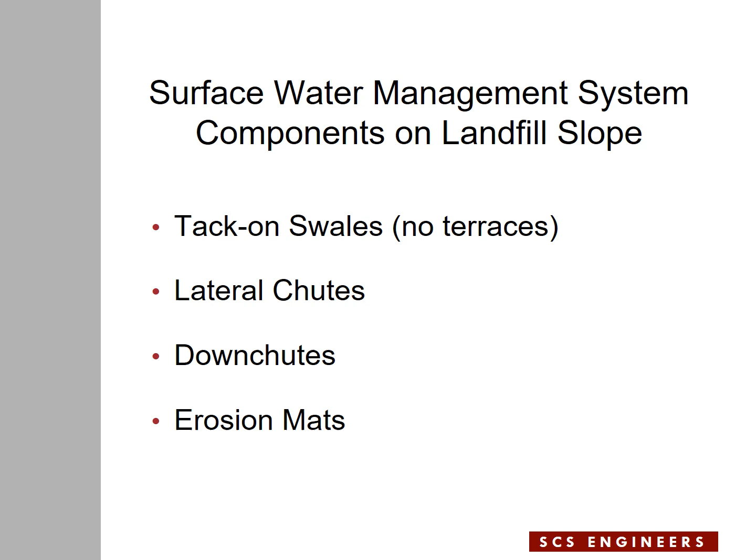Downchute pipes in the cover system are a simple design. There are two pipes at each location. You can of course use a single pipe depending on the geometry of the slope, the drainage basin that leads to the downchute pipe, and some other factors. The length of the swales is another factor that comes into the picture, whether you need one pipe or two pipes. But with two pipes, here is the layout and detail of it.

The pipes are 5 feet apart, 16-inch diameter pipes, located directly on top of the geocomposite drainage layer of the final cover. The geomembrane of the final cover is directly below the composite. This detail shows a 1 foot thick grading layer below the geomembrane, and then protective cover that goes over the geocomposite, normally 2 feet thick, which may vary from state to state.

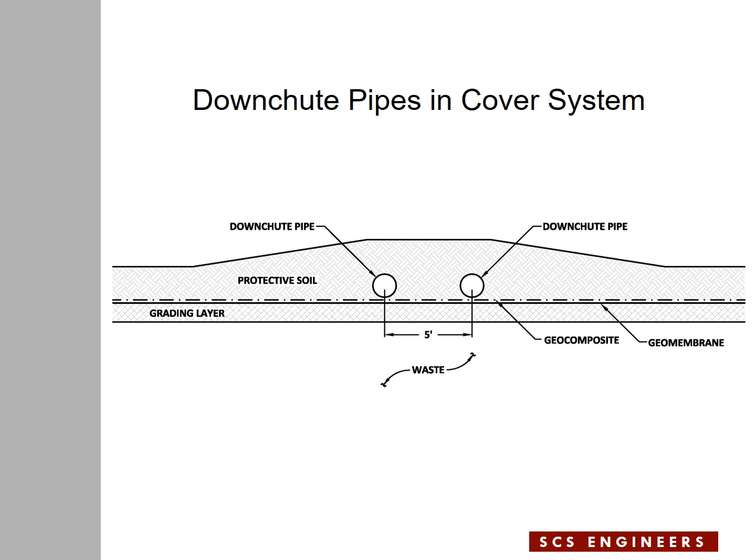On the plan view, this is the layout of the downchute pipes in the middle, shown with a kind of background color. Also connecting to the downchutes are the lateral chutes that are branching off, one from each downchute pipe. The elliptical black lines are the openings to the lateral chutes, located at the low point of each swale, one to the right, one to the left. The flow line of these swales is normally at a 2% slope. The small ellipticals with a black arrow and a slope number attached are just slope inclination indicators.

So anything in the upper part of the page above the 2% notations are the landfill slope down at 3-to-1 slope. On the swale we have 5-to-1 slopes toward the 2% flow line of the swales, and below the 5-to-1s are 2-to-1 slopes that extend some distance down the slope, and then they get converted to 3-to-1 slopes.

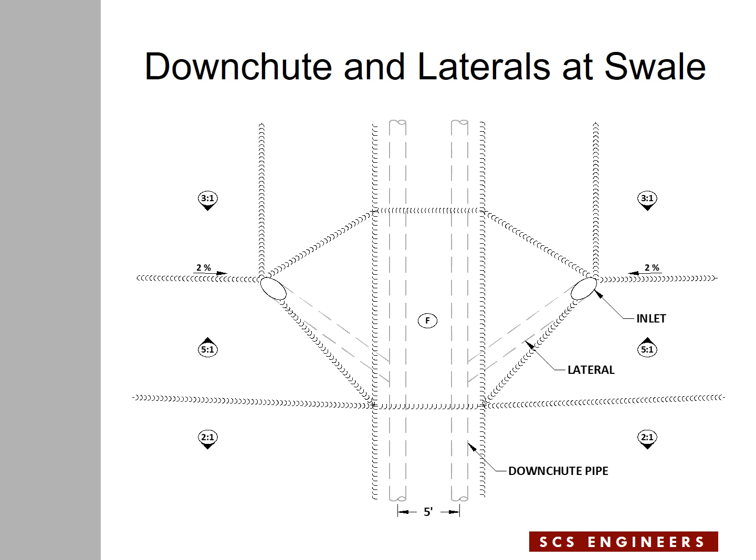We have incorporated this final cover concept in many of the permits we have worked on during the past many years, and we have constructed partial closures which included these systems in many cases. For example, at the Okeechobee landfill we have constructed 5 partial closures, 5 phases. Medley landfill, 4 phases. Monarch landfill, 6 phases. Naples landfill, 1 phase. All of them have this system in them.

To the right side of the slide you see the bottom of the slope, and to the left side is the upper part of the slope. This is a partial closure in the sense that a portion of the slope had reached final grades, and the client wanted to cover that portion of the slope. That's why it is called a partial closure. Later on, when the landfill extends vertically up in elevation, there will be another partial closure above this that would tie into this one at a later date. At this stage in this slide, the surface of the slope is prepared, but no geosynthetics are installed yet.

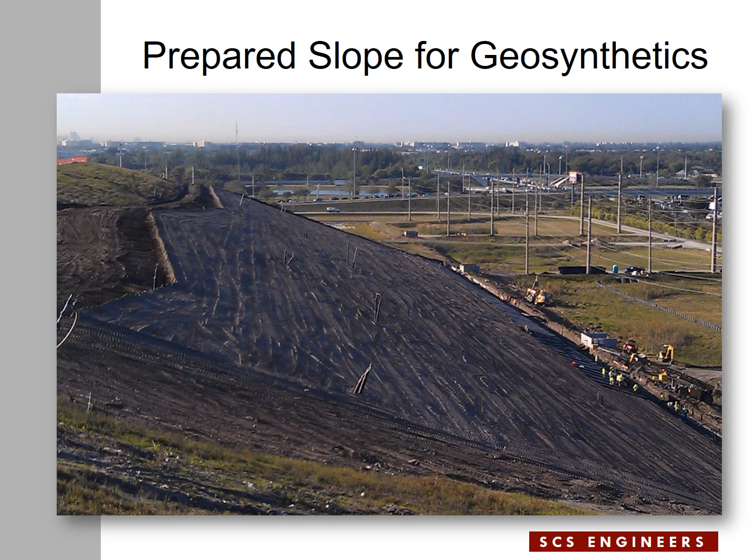That's a fairly wide perimeter ditch. This is not a normal size perimeter ditch, because there are high voltage power poles within this perimeter ditch easement. This is a special arrangement at this site because a utility company, Florida Power and Light, has a substation near the landfill, and the power lines go around the landfill to the substation. So we reached agreements with the utility company many years ago to have pads across the width of the perimeter ditch for the poles to sit on, and the space between the poles will be used as perimeter ditches for the landfill.

Now I'm going to present to you the tack-on swales on the slope, a simple graphical presentation of a tack-on swale.

Here's the tack-on swale. The landfill slope is 3:1 at the geomembrane level. Above the geomembrane is a geocomposite drainage layer, and above that generally is 2 feet of protective soil that goes over the composite. But every so often in vertical distance we'll have a tack-on swale that gets constructed. This is a conveyance swale that receives runoff from slopes further above the swale and conveys the water to a low point within the swale system.

The shape of the swale is generated by creating a mound below it, which is the tack-on berm. The outside slope of the tack-on berm is 2:1, merging into the 3:1 further down the slope. Over the swale area, the upper side is the landfill slope at 3:1. The left side of the swale is a 5:1 slope, normally made 10 feet wide. The reason for such a large dimension is because we want to make sure the equipment that will be used in the future to maintain the system can operate within it.

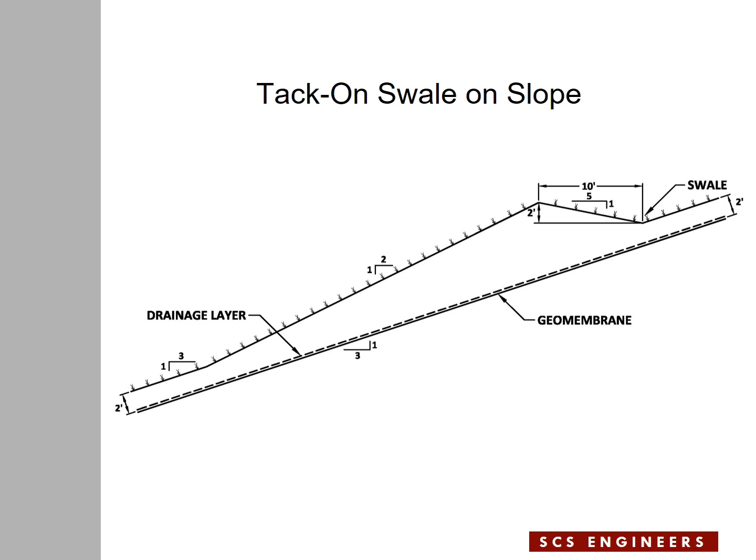Now I'm going to go through some slides from construction events for the construction of the swale.

Here you can see the slopes. To the right side of that orange flag is the landfill slope at 3:1. To the left side of it is the 5:1 slope of the swale, and the hump you can see is almost forming in this slide, going down at a 2-to-1 slope, blending into the 3-to-1 slope of the landfill further down.

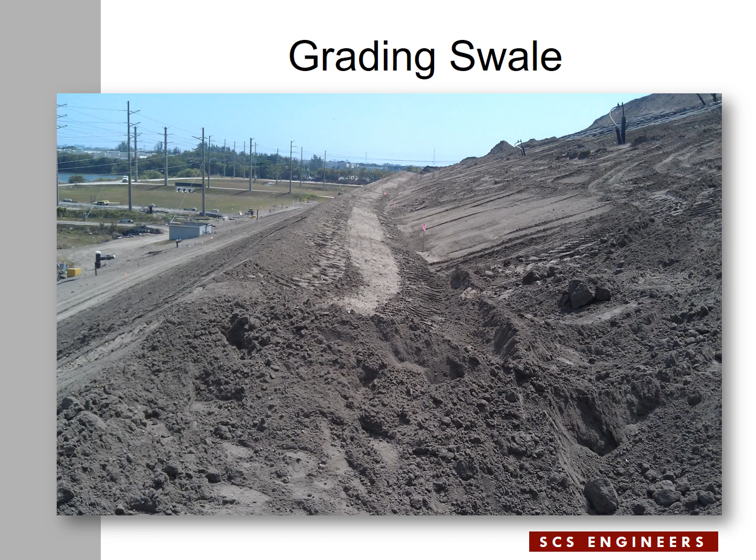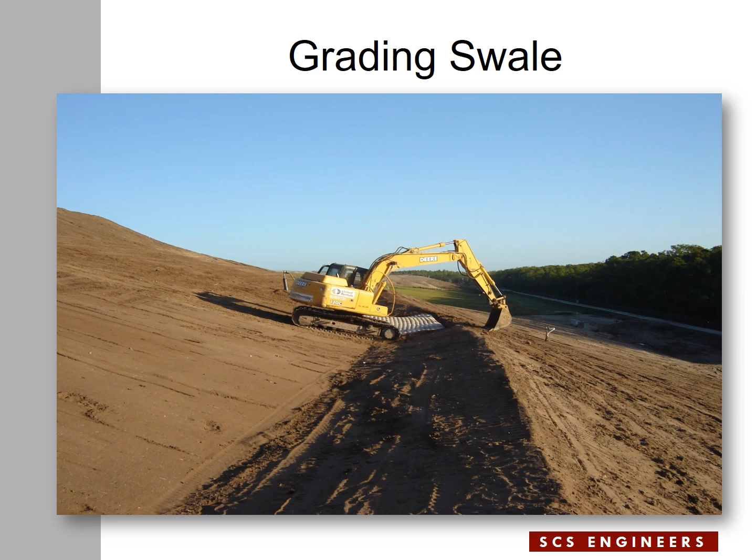Here's the equipment that is shaping the slope. To the left side of the equipment is the typical landfill 3-to-1 slope. The 5-to-1 slope of the swale is between the bucket and the body of the equipment, and to the right side of the bucket is a 2-to-1 slope, blending into the 3-to-1 slope further down.

Here during construction, we make sure that the contractor shapes the swale in a proper way. This is one way to make sure that the width of the 10-foot 5-to-1 slope is created in the field, in terms of the depth of the swale, which is about 2 feet deep directly above the flow line. They have to meet that.

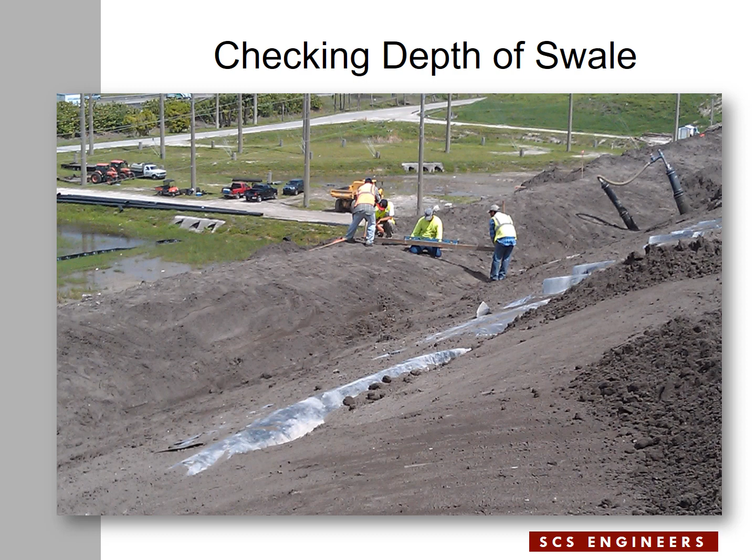So it's in the midst of shaping and forming the swale. Then the surveyors come on site. They check the 2% flow line of the swale, and the shape of the slope, whatever it is that we install the cover system on, they stake the slope at 2% to fit the shape of the slope. We don't normally require grading of the slope to a perfect 3-to-1 or very geometric shape. We normally work with whatever slope is there, building it at 2-to-1, 3-to-1, or 5-to-1 as needed, and the 2% flow line fits the shape of the slope as is.

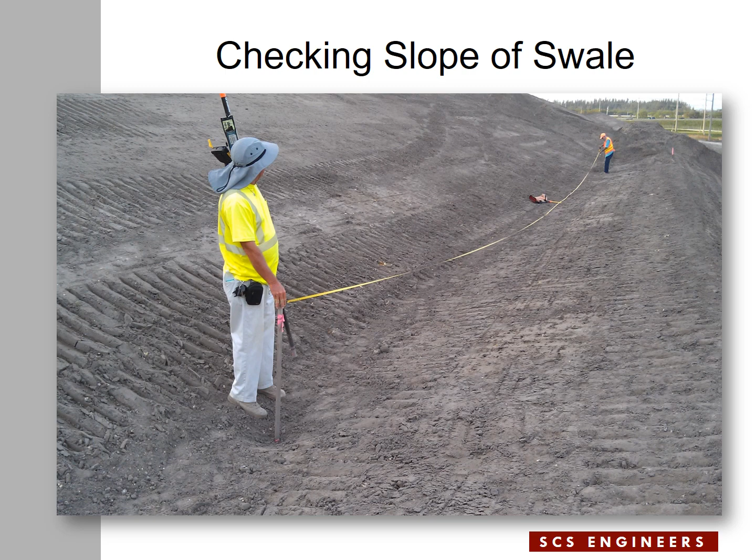Here they're getting to the final shaping of the swale. The stakes mark the width of the 5-to-1 slope, which is 10 feet. The dozer is shaping the flow line of the swale.

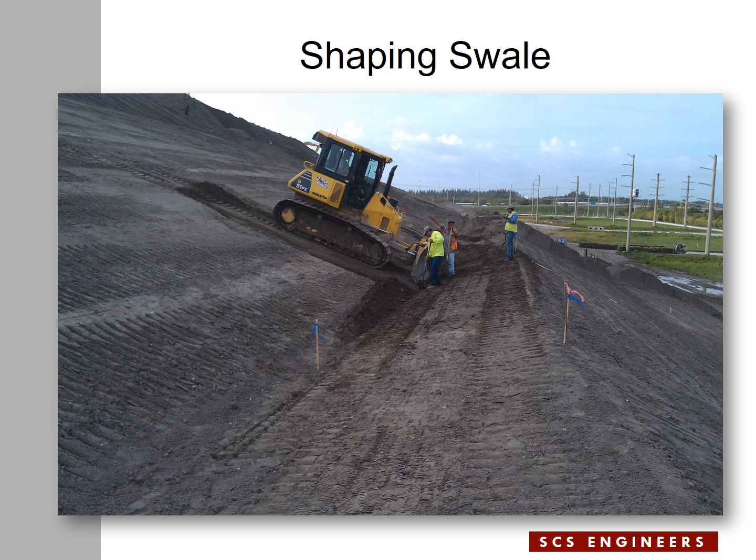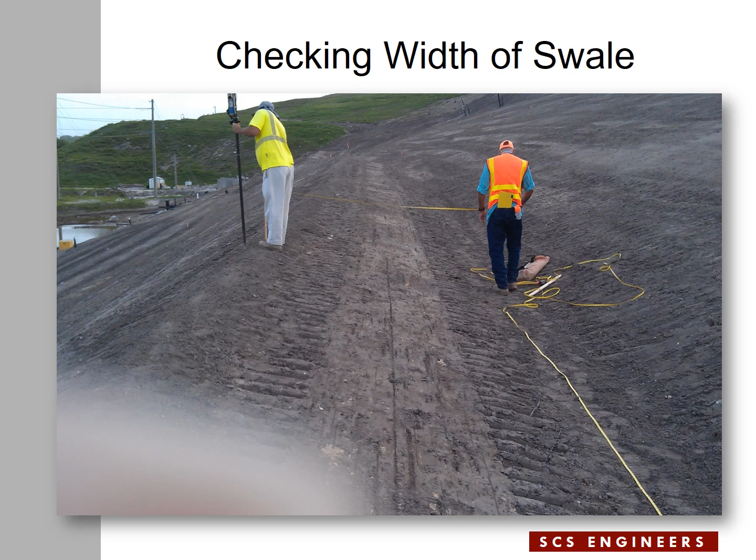Again, the surveyors check the width of the 5-to-1 slope, which is supposed to be 10 feet, in addition to the 2% slope for the flow line of the swale.

You can easily see in this slide the slope that the swale has toward the forefront of the slide. The stakes reflect the width and the location of the flow line and the hump in the swale. Further back, they are still working on some components of the swale system.

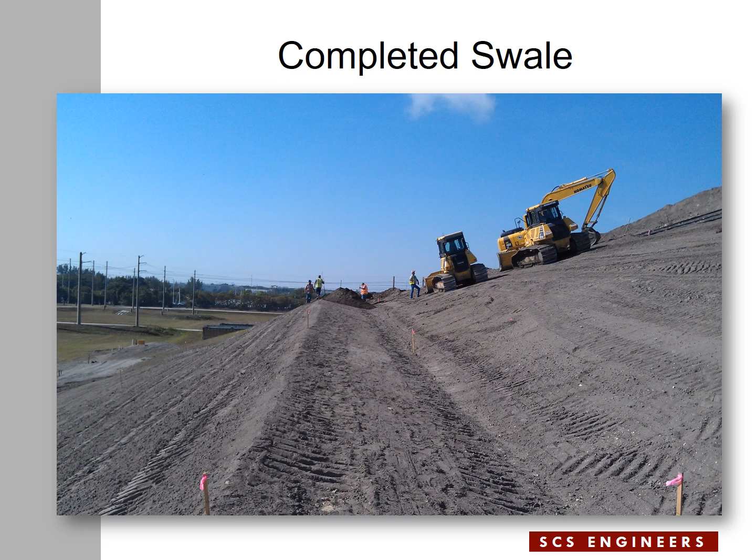It's pretty clear that this portion of the swale in the forefront of the slide is pretty much finished. Where the two fellows are standing, the one to the right is about the low point of the swale. Behind him you see the other side of the swale, sloping toward the low point. So the swale system is shaping up pretty good in this slide.

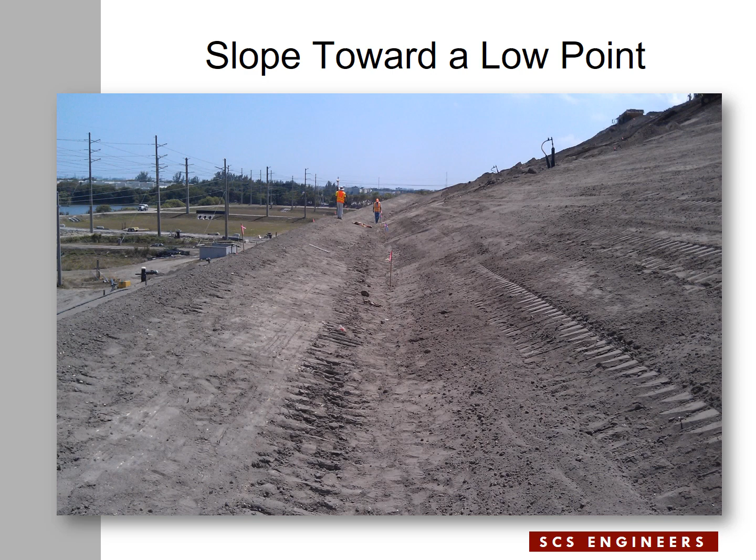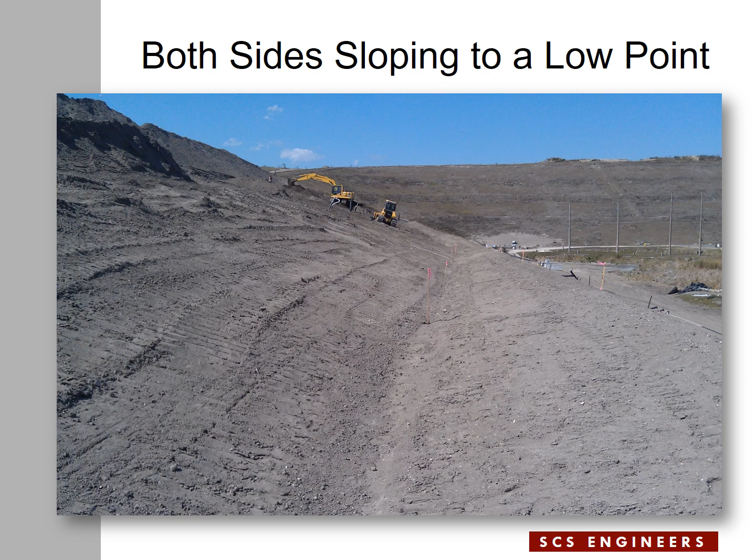Again here you can see the two sides of the swale, one each at 2%, sloping toward the low point. Right in the middle of the slide there's the low point. The back area of the slide shows the 2% toward the low point, and the forefront of the slide shows the 2% toward the low point in the middle.

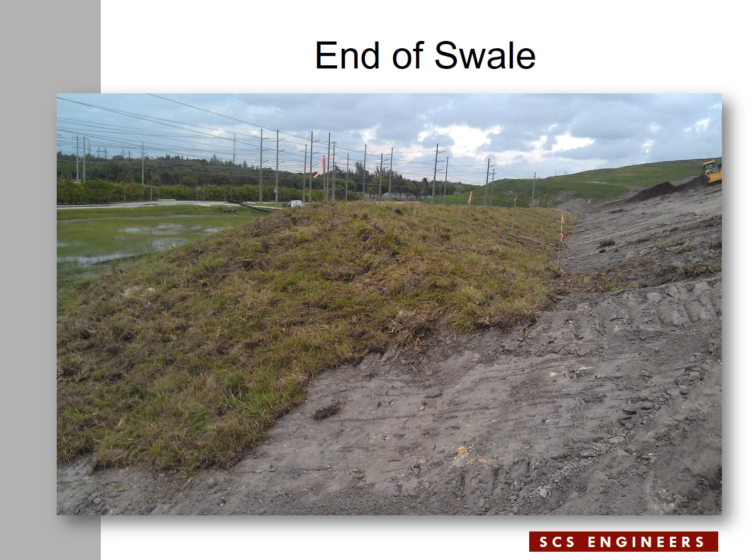Here is kind of an overall view of the project area, and there are two swales on this portion. The lower swale is shaped pretty good, and the low point is very clear in this slide, sloping from the low point toward the high points.

The forefront of the picture is another partial closure which was done some years earlier. Eventually the swales on the new portion and the swales on the old portion will come together. There is a temporary lined chute between the new section and the old section that will eventually be removed. The temporary chute carries runoff from the higher part of the landfill toward the perimeter ditch, but that temporary system will be removed at a later date.

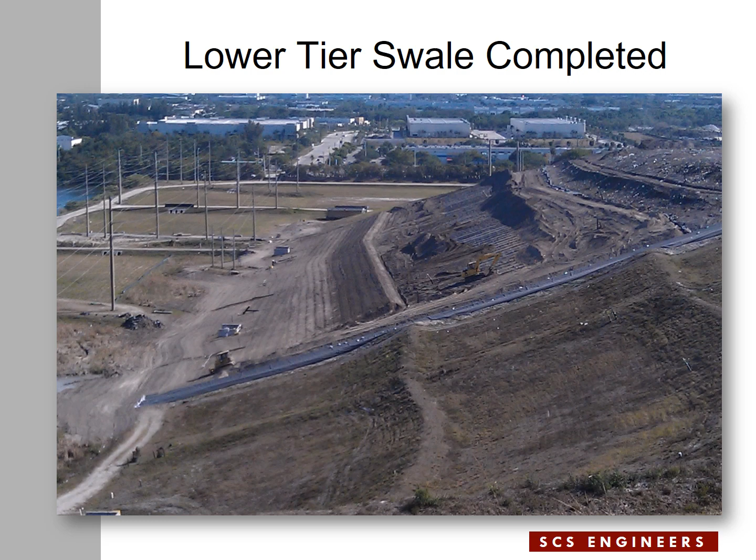In this slide, they are working on the upper swale. It is not shaped perfectly yet, but that's the process for shaping. As the soil progresses over the slope from the bottom to the top, they gradually shape different components of it.

Here is a later stage of that. Both swales are shaped and the slope is sodded, or the majority of the slope is sodded. Now the area above the upper swale is being shaped and formed, and there is a temporary swale at the very top of this partial closure.

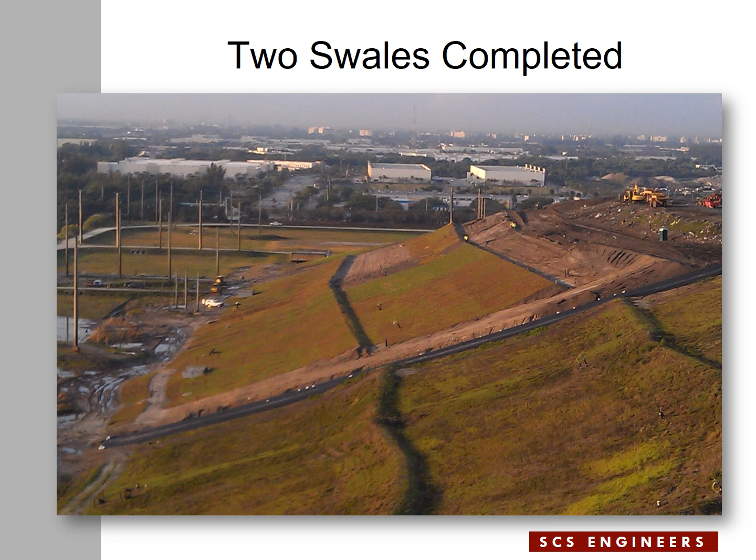Of course, this partial closure is slightly different than the one I showed you earlier. This one has only one single low point where the downchute is going to be installed. And now, in this slide, they're working on the temporary swale at the very top of the partial closure.

This is again the swale. The slope below the swale is sodded. They're also working on sodding a portion of the upper slopes. The area at the low point of the swale is where the downchute pipes are going to be installed.

Now, the temporary swell at the top. I spoke about the temporary swale at the top. Now we are going to look at more details, or more photos, of it.

This is where the upper end of the partial closure is. To the left side, the partial closure is near completion. To the right side is the landfill slope, uncovered, leading to the higher portion of the slope. At the forefront, where the flag is, is the end point of one of the downchute pipes. This end point is a temporary end point.

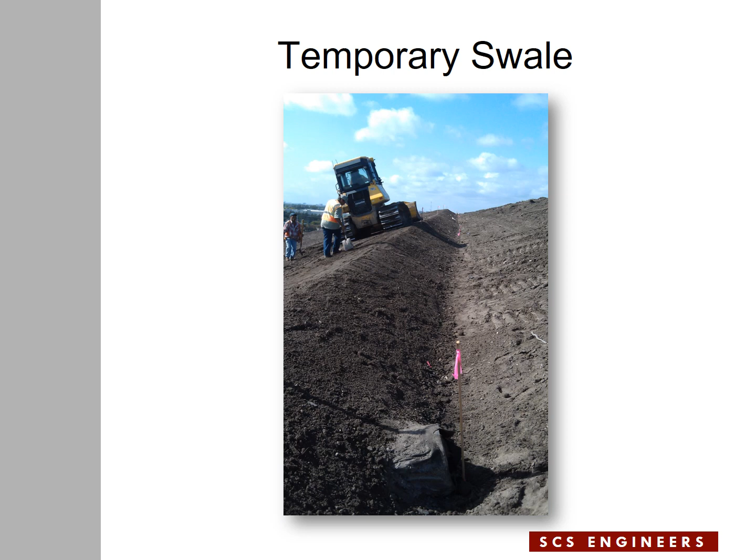This is the low point of the temporary swale. The two downchute endpoints are visible here. The equipment and the crew are shaping the slope in this case. Again, to the right side is the landfill, uncovered landfill slope. To the left side is the partial closure that is near completion.

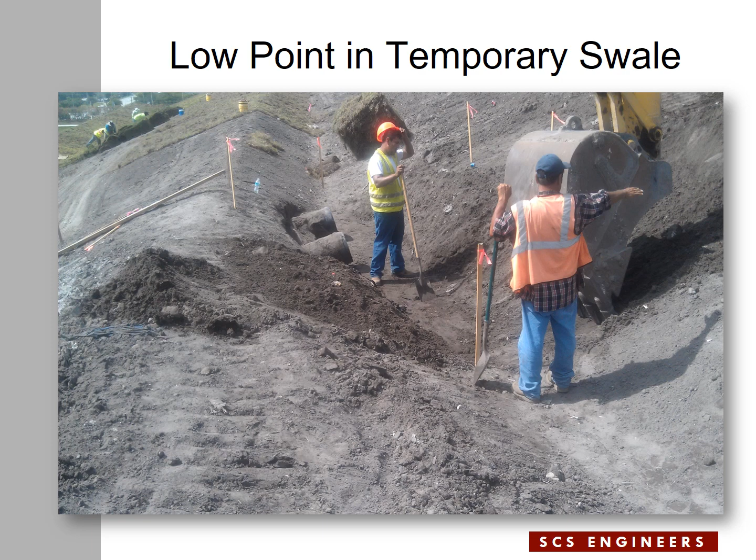Now we are going to discuss construction of downchute pipes on the slope.

One of the ways to construct the downchute pipe is welding the pipe segments outside the project area. In this case, the pipe segments are already welded together outside the project area, and the pipe, as you see it attached to the equipment, is the full length of the downchute pipes with Y couplings attached to the pipe at certain points. These are the lateral chutes that were measured from the design and the field conditions and placed in the pipe system at certain locations.

After the pipe is put together, the equipment pulls it over to the project area and pulls it onto the opening where the pipe is going to be installed.

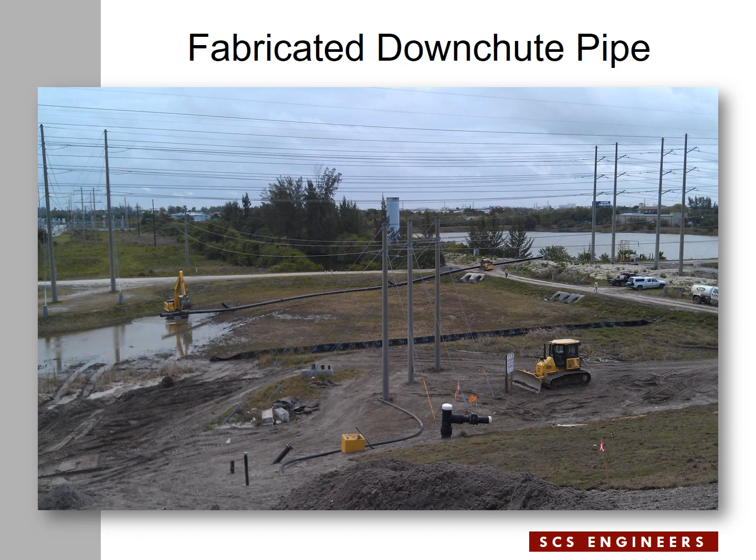Here it shows the trench where the pipes are going to be located, and in this picture it shows the equipment pulling the pipe into the trench for positioning the pipe in the right location. If you look carefully at the forefront of the slide, you see one of the swales, the upper swale, is shaped, and further down, a slightly different shade of gray, right at the top of the front one, is the second swale down, closer to the bottom of the slope. So the swales are all shaped.

Then, like I said, this contractor came in and excavated at the low point of the swale in order to install the pipes.

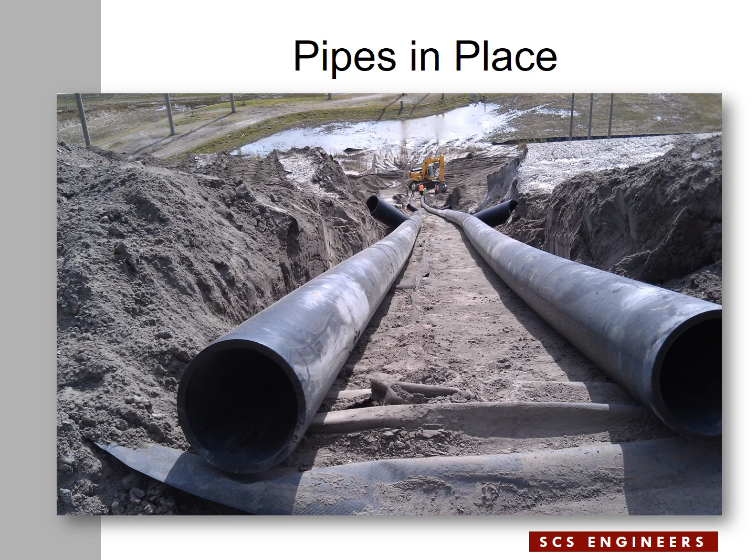Here's a picture looking down. The two pipes are fairly close to final position. You see the Ys sticking out, one to the right, one to the left. The end points of these Ys are at the low point on the swales. The one to the right connects to the low point of the swale to the right. The one to the left connects to the low point of the swale to the left. The same thing happens at the other Ys further down the slope.

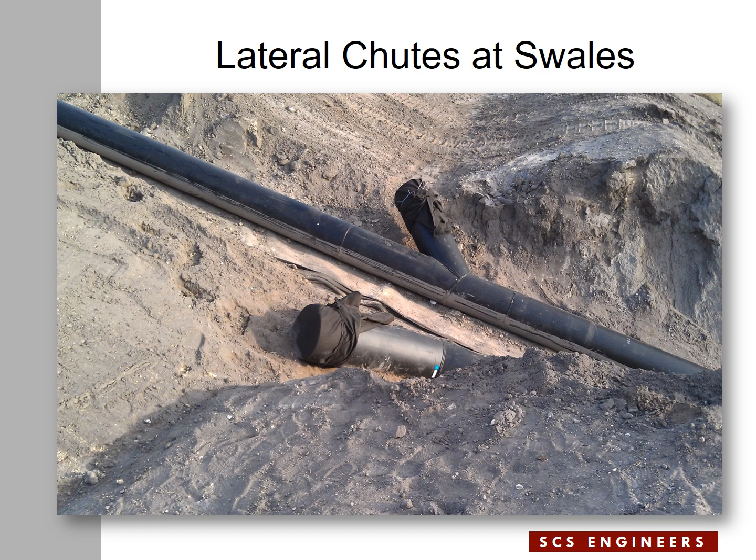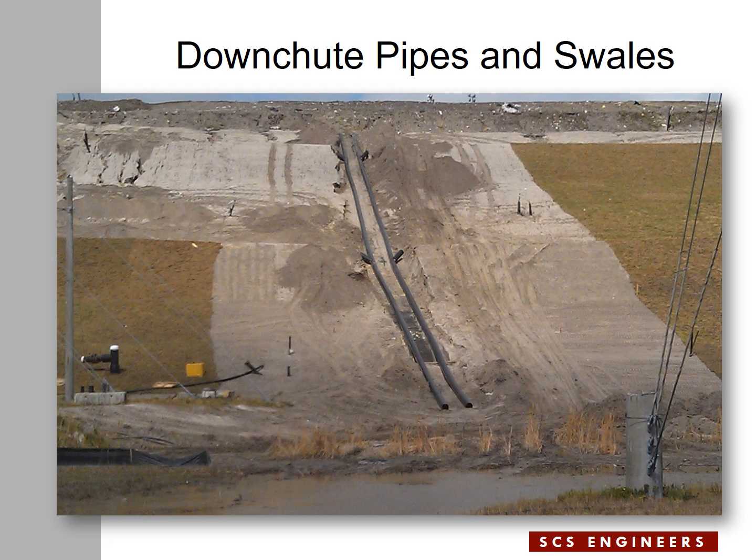Here's an overview. The two pipes are in place. The Ys are the lateral chutes that connect to the low points of the swales. In this case we have two swales, so we have two sets of lateral chutes on the downchute pipes. At the bottom end, the downchute pipes are at the perimeter ditch. The top end of the pipes are at the temporary swale at the top of the partial closure.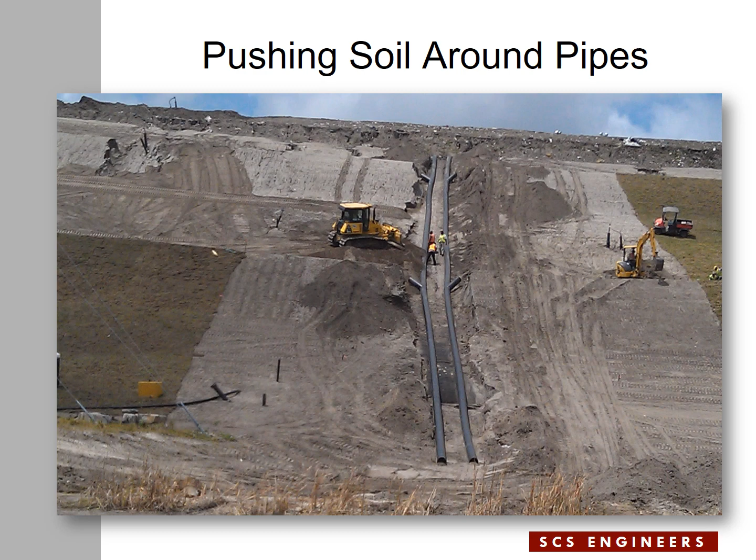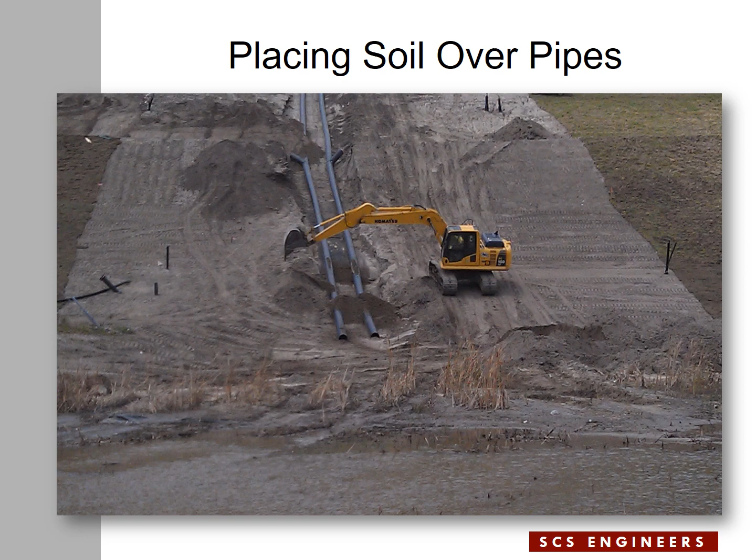Again, here the equipment is pushing dirt over the pipes, and the crew around that area is making sure the pipes remain in position until the filling is complete. Here the equipment is putting dirt over the pipes near the bottom in order to secure the pipes, and further up you see some dirt is already being pushed over the pipes.

Looking down, you see part of the pipe is already covered with dirt, and in the center of the slide you see the two sides of the swale. Eventually the two sides come together, and where the pipes are, you will end up with a hump over the pipe, because we want to make sure that we have 2 feet of soil over the pipe, directly above the pipe, so we'll end up with a hump between the right and the left portions of this slide.

This is the hump that is being formed over the pipe. The flags again show the top width of the hump is sloping at a 10-to-1 slope to the right side and to the left side. The reason we make it 10-to-1 is because we want to make sure that the mowing equipment in the future, when it's sodded and they come to mow the grass, can easily get over the hump without damaging the slope.

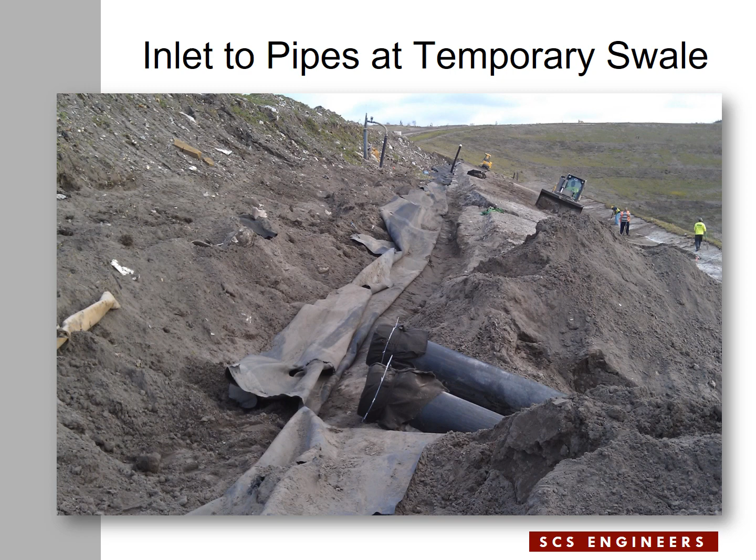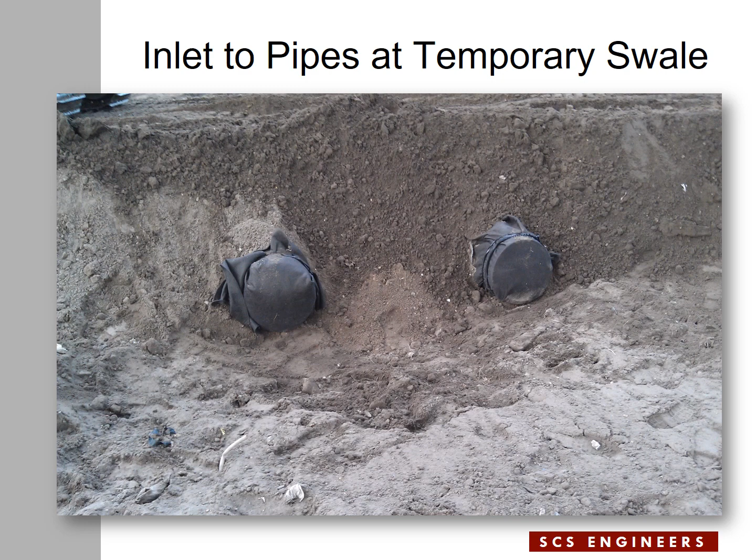This is the upper part of the partial closure where the temporary swale will be located, and you see the two ends of the downchute pipes at the temporary swale. Again, at the same two ends, soil is placed over the pipe. This is the low point of the temporary swale.

Now this is showing from the perimeter ditch looking up. The two outlet points of the downchute pipes are visible here. Sod is placed over the slope, and the area around the pipe is not sodded because that area is going to receive the erosion control mat or fabric form. I'll show you that in the next few slides.

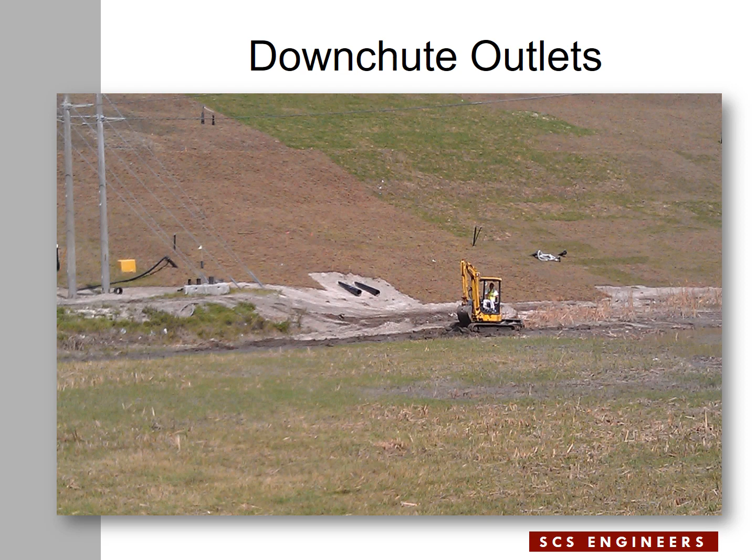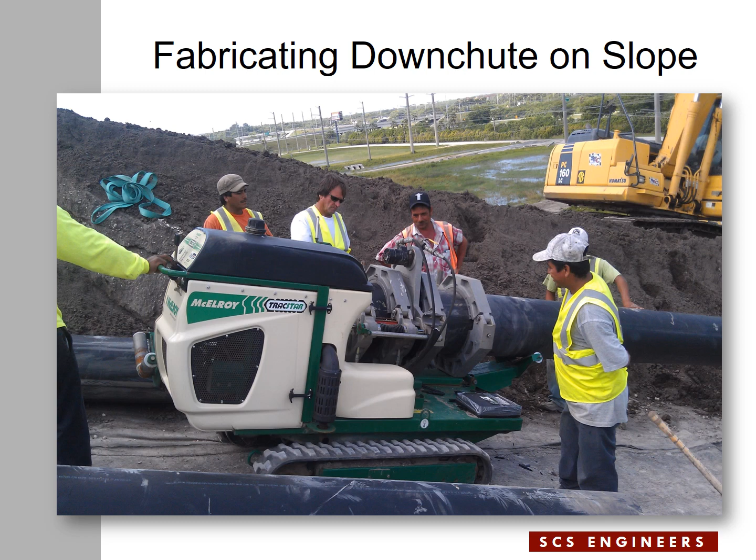Another way to do the piping is to put together or weld the pipe segments on the slope. In this case, the contractor is doing the welding directly in the trench where the pipes are going to be located. This is again the pipes in the trench between the two sides of the swale at the low point of the swale system. The welding machine is visible to the left, and they're putting pipe segments together with the Ys that are the lateral chutes at specific locations.

Another picture of that operation. The welding is going on near the center to the left side of the slide. See the lateral chutes already welded into the pipe system. The bottom of the downchute pipes at the perimeter ditch of the landfill.

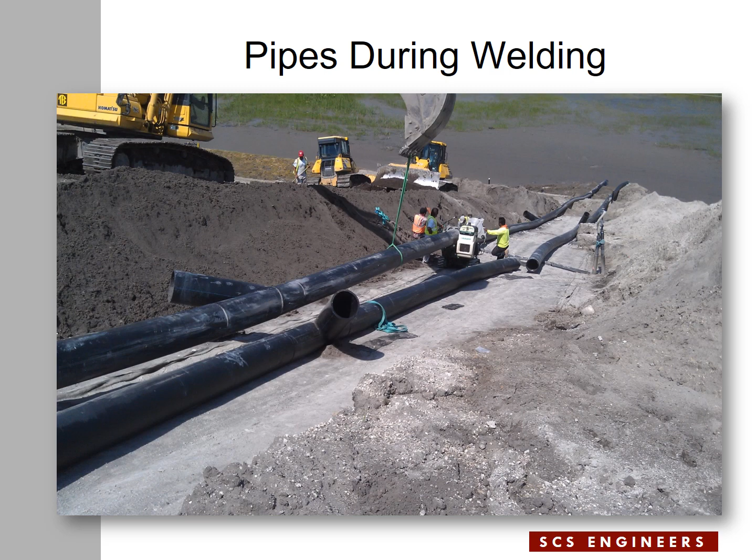This is the two downchute pipes in place and in position, and the next step would be pushing dirt over the pipes.

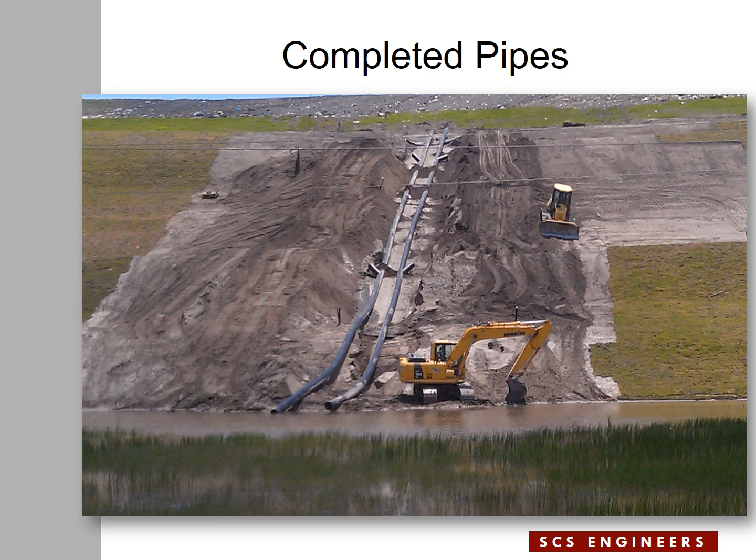Now, erosion mat that goes at the lateral chutes. Where the lateral chutes are, you see the end point or opening to the lateral chute, and in this case there are always two of them if you have two downchute pipes. We normally cover the area around the opening to the downchute with Fabriform.

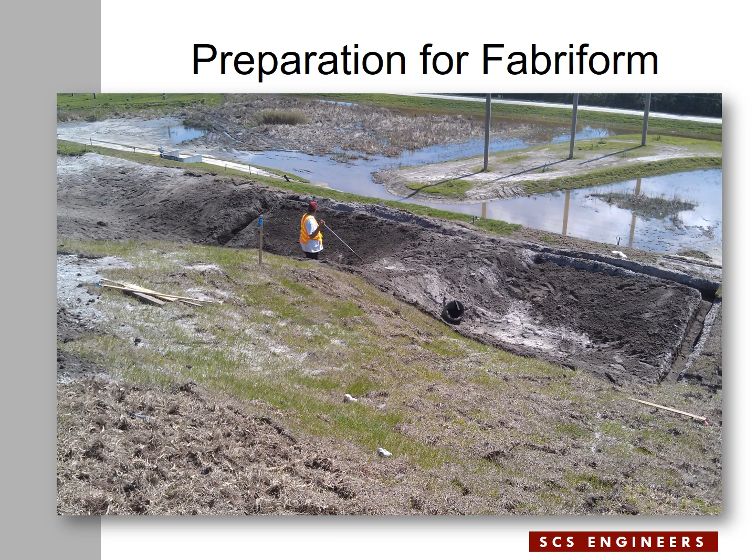And before we install the Fabriform, we dig anchor trenches for the edges of the Fabriform. These trenches that you see are the anchor trenches to secure the Fabriform material in place. The Fabriform is a prefabricated system. It consists of two layers of geotextiles prefabricated in the plant, with sewing patterns that leave interconnected squares between the two geotextiles.

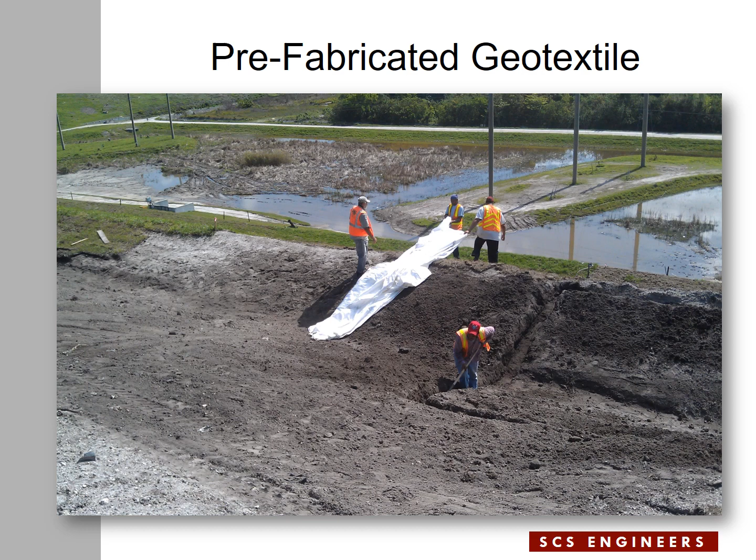At this point, they're opening up or stretching out the previously folded package from the plant in order to lay the Fabriform over the lateral chute area.

Here the Fabriform is being pulled over the area that's going to be installed. To the right side you see the opening to the lateral chute, and I think the anchor trenches for the Fabriform are visible here.

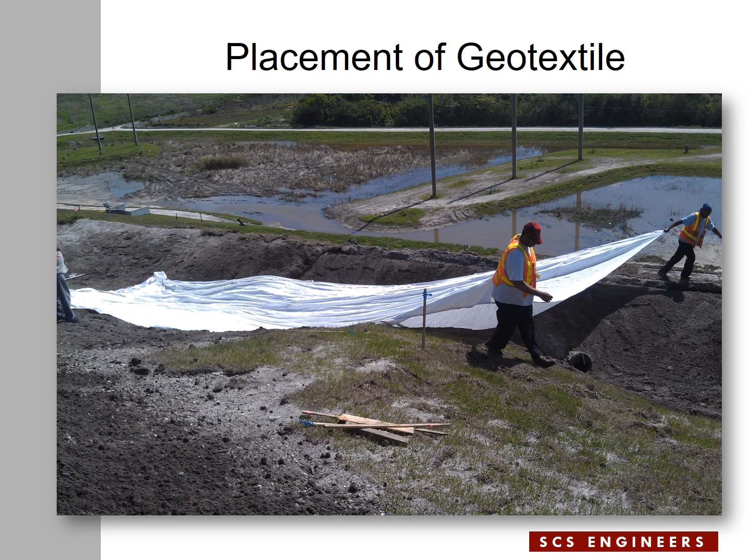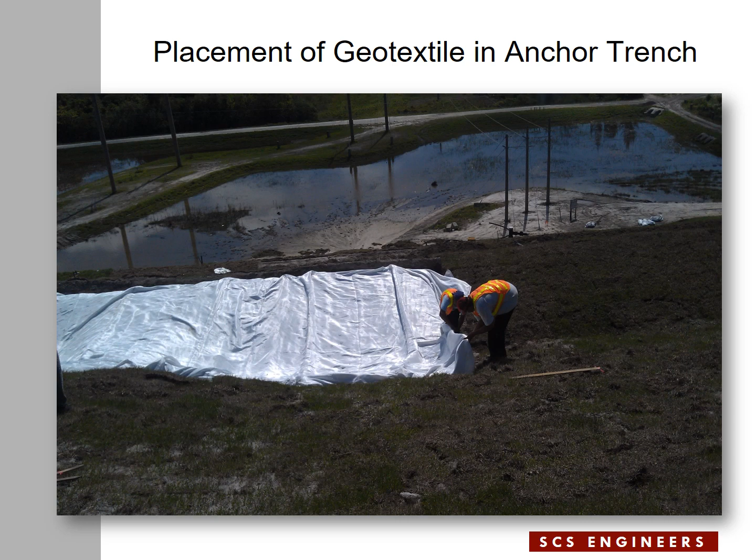The Fabriform is being installed in place, and the edges of the Fabriform are pulled into the anchor trenches. It is near completion for the installation of the Fabriform. You see next to the guy in the middle there is an orange color cross mark. That's the opening to the lateral chute. They're going to cut the Fabriform there in order to daylight the lateral chute through the Fabriform.

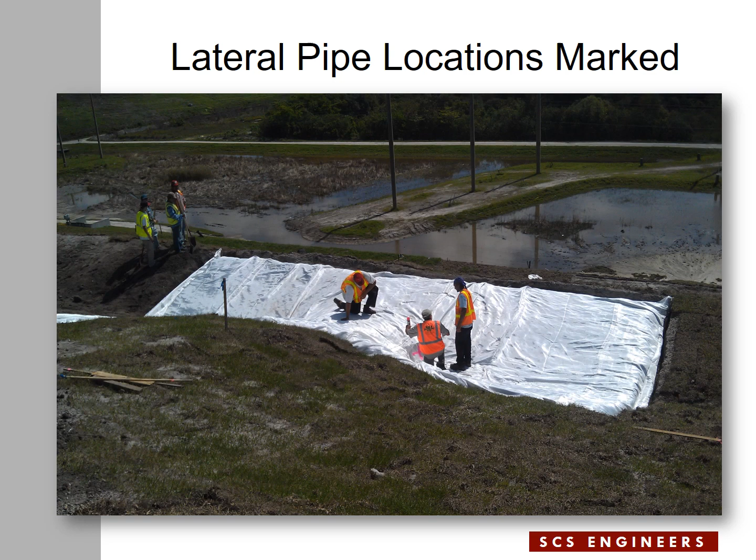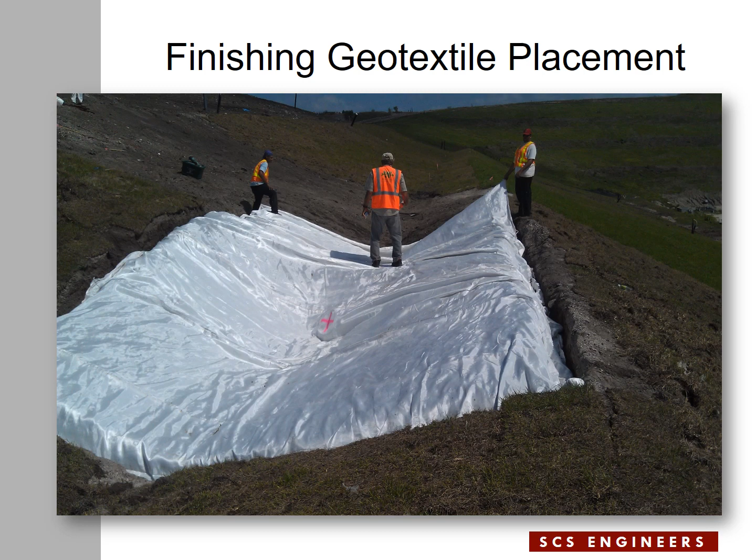This is again the cross mark shown. That's where the inlet to the lateral chute is. The Fabriform installation is near completion. Another angle of it. In this case, the Fabriform has already been cut and pulled over the opening of the lateral chute. All of these are kind of fabricated, and the end points of the pipes are cut to the proper dimensions to make sure that after the Fabriform is completely installed and filled with grout, there is no lip to the pipe.

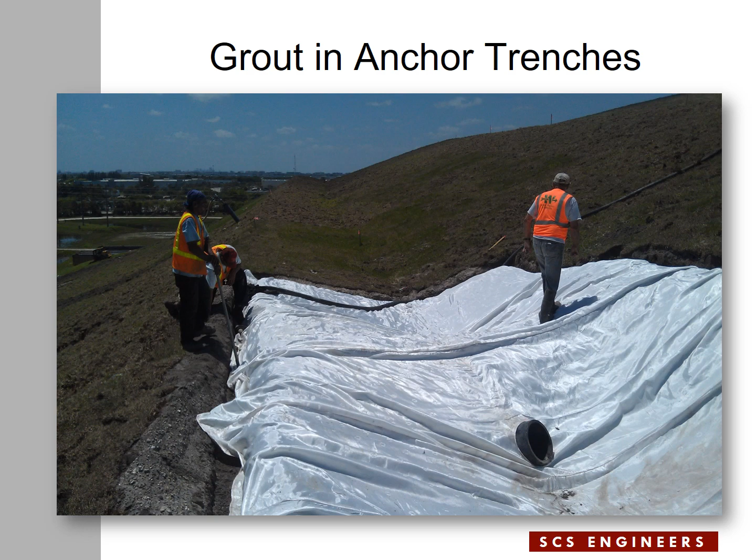We want to make sure the water that gets on top of the fabric form goes directly into the pipe without any ponding near the opening to the lateral chute. And in the center and to the right side you see a dark color, like a 3-inch hose, extending from the upper part of the slope down to this. That is the hose that brings the grout to the fabric form. They're going to pump grout into this geotextile fabric form system.

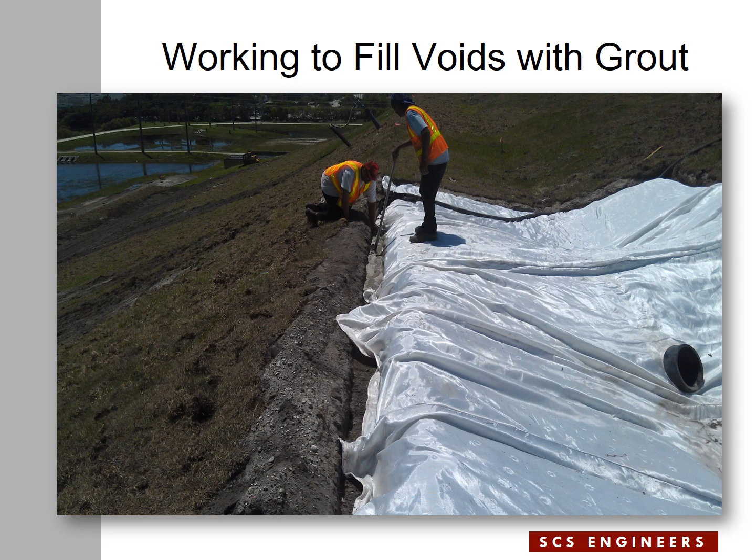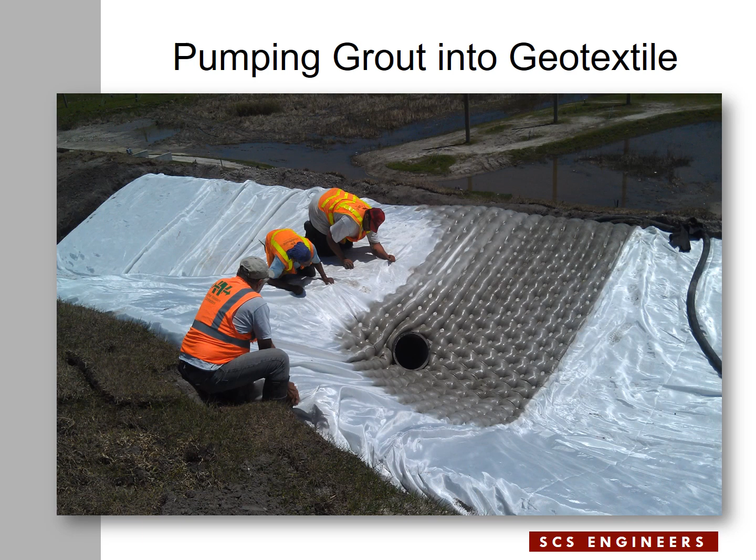They're filling the anchor trenches with grout here in order to secure the edges of the fabric form. Then they begin pumping grout into the fabric form between the 2 layers of geotextile. And since the squares that are generated by certain patterns of sewing between the 2 textiles are interconnected, the grout travels from one grid to another, and eventually shapes the fabric form as you see here. The darker or grayer side is where the concrete is already pumped into the fabric form. It's still going on. They are filling the anchor trench as well as pumping into the geotextile.

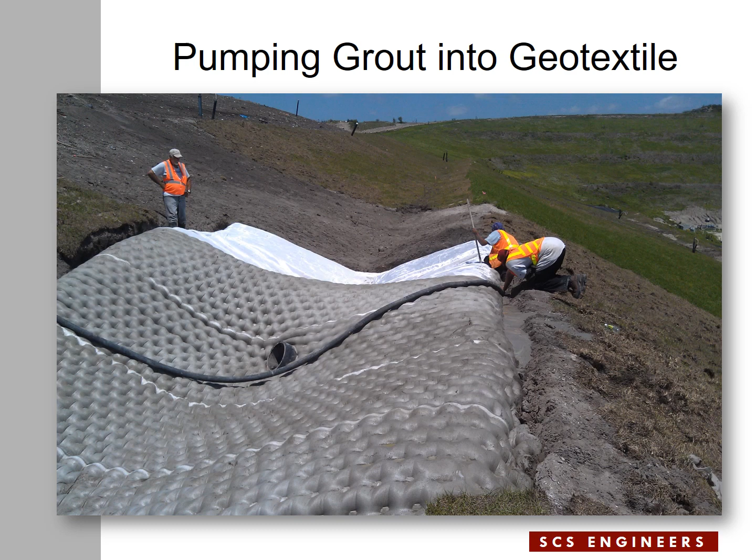One side of the lateral chute is completed. Now they're moving on to the next side, and as you see, the end of the lateral chute is extending out through the fabric form. Eventually they will cut the excess pipe and flush the end of the pipe with the surface of the fabric form. Here is a picture looking down from the upper part of the slope. The second part of the lateral chute is being completed. It's a further stage of that grout pumping operation. The lateral chute is coming to the final stages of shaping and forming.

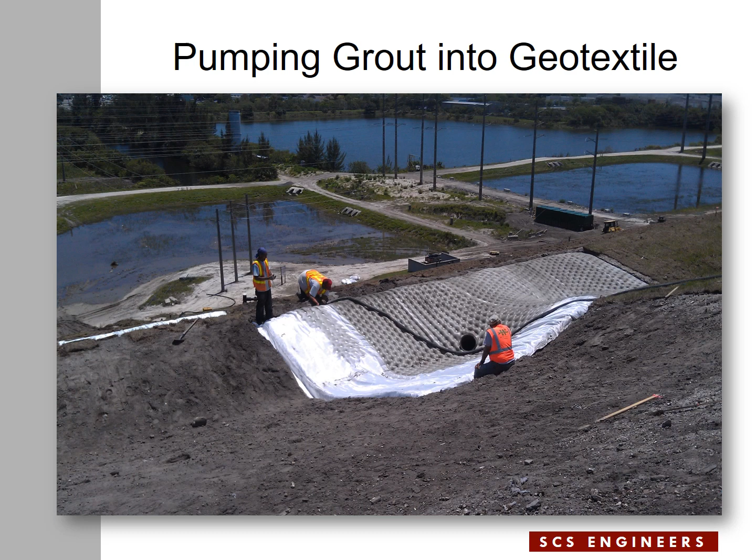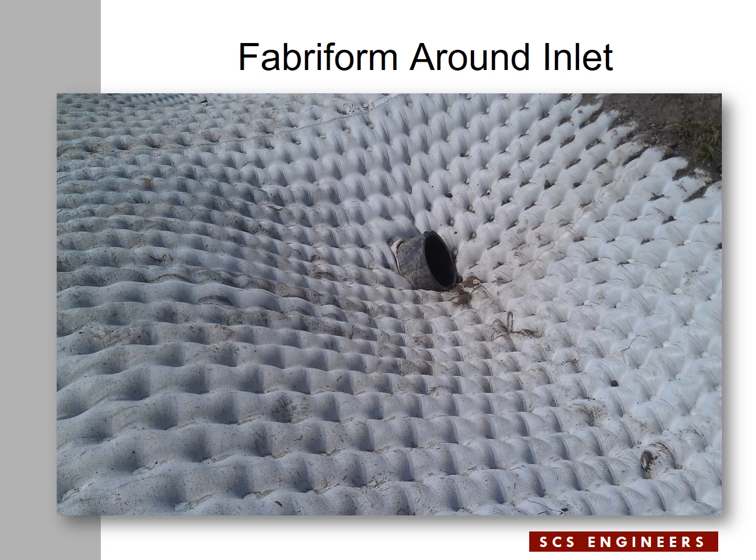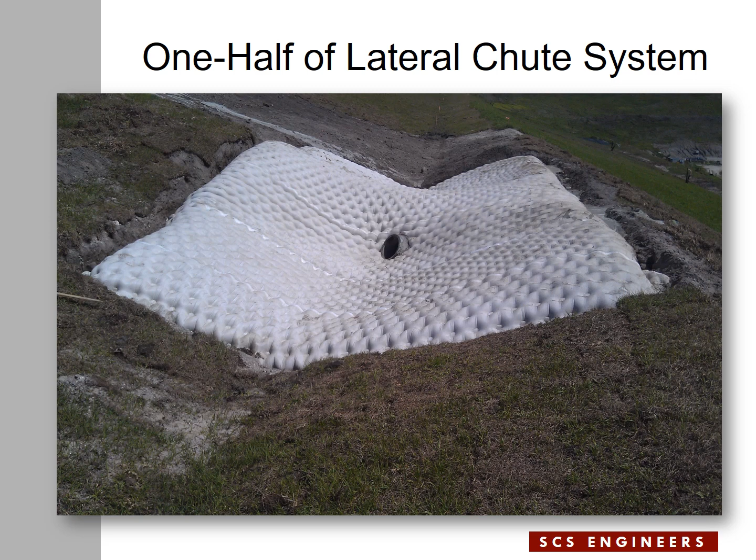Here is after completion. As you see here, the invert of the lateral chute is flush with the low point of the fabric form, so water flowing toward the opening of the pipe on top of the fabric form doesn't get ponded and can easily get inside the pipe. And behind the pipe there's a hump between the 2 sides of the downchutes and the 2 independent lateral chutes. Here is again another picture of it after the grout is set. Around the perimeter, the fabric form is not filled yet. At a later stage they come in and fill the anchor trenches and shape the area around it.

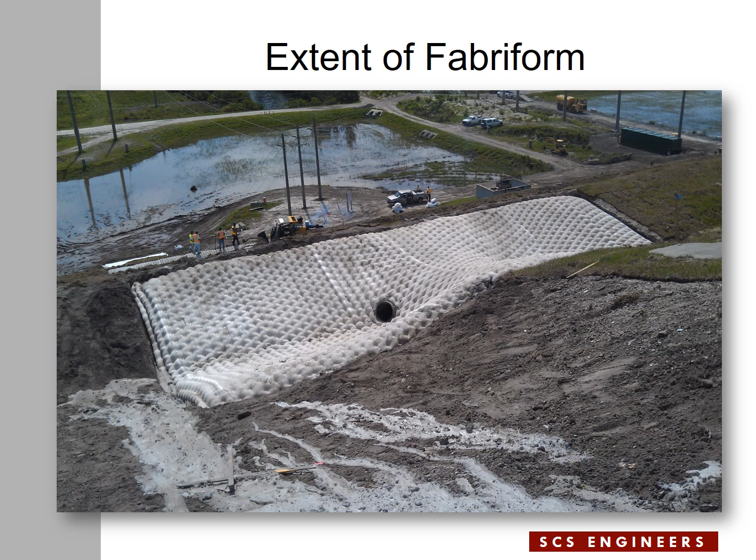This is a picture looking down. It is a completed Fabriform around the lateral chutes. The other lateral chute is not visible in this picture, but it's very similar to the one that you can see in the center of the slide. And to the right side of the slide you see the hump over the downchute pipes. Now they're filling the anchor trenches with dirt in order to shape the area on all sides of the Fabriform. Especially at the front side of the slide, they shape it so that water can easily flow off the grass area onto the Fabriform to the pipe.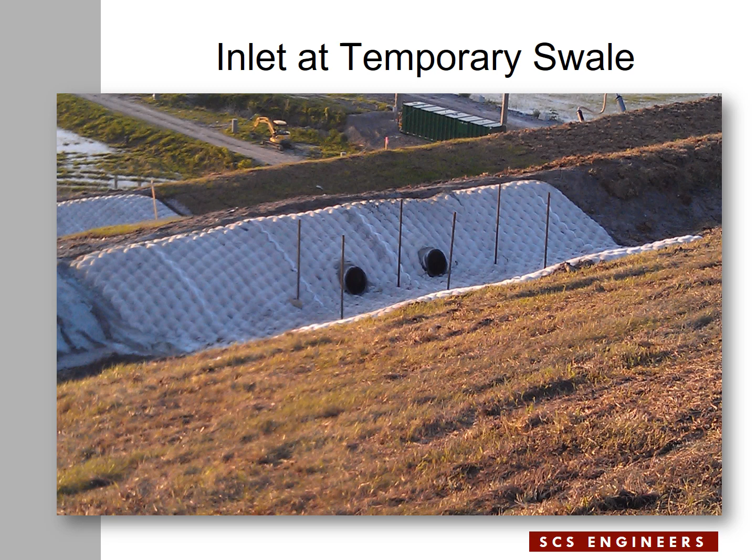And since this temporary swale can receive runoff from the active areas of the landfill or unclosed areas of the landfill, we kind of put a cage around these pipes in order to catch debris that may come down the slope. We don't want the debris to get inside the pipe, but we make sure that the operator is very well set up in order to clean this area on a regular basis, because we don't want too much trash around the cage, and eventually water cannot get in and overflows this system and will damage the cover system.

Let's see closely. The cage is in place, the openings to the pipes are visible, and the fabric form around the opening to the downchute pipes.

This system that you see in front of you is a temporary system. Like I said, some years down the road, when we come in to install the next partial closure above the one that is completed in this slide, this fabric form will be taken out, the cage will be taken out, and the cover system will extend, and naturally the downchutes will be extended further up.

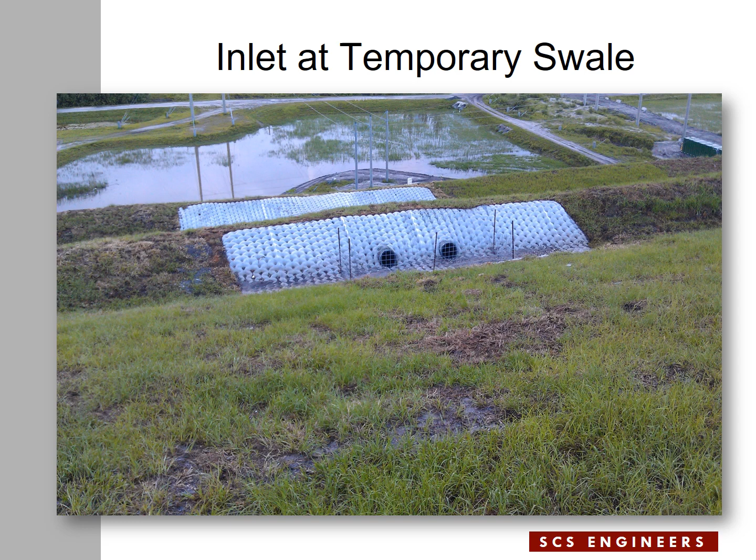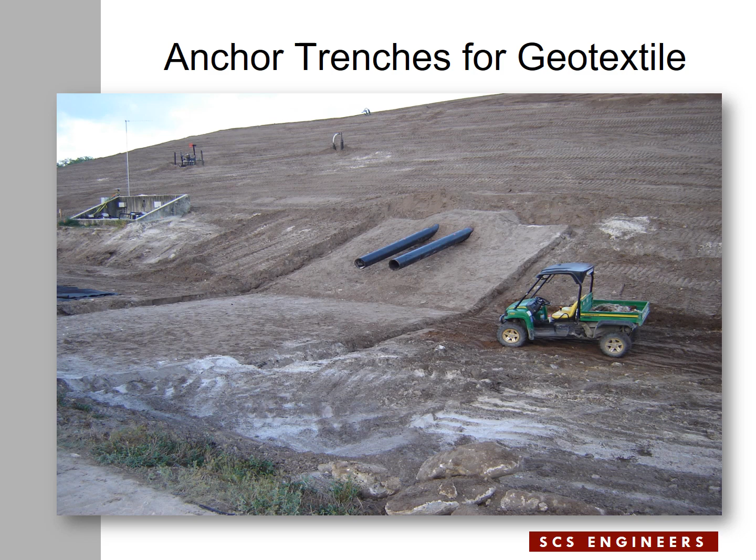The area that the fabric form will be installed over is very well shaped and graded, and there's an anchor trench around that area that is visible in this slide. This is the anchor trench, and in the middle of the slide you see the hump over the downchute pipes.

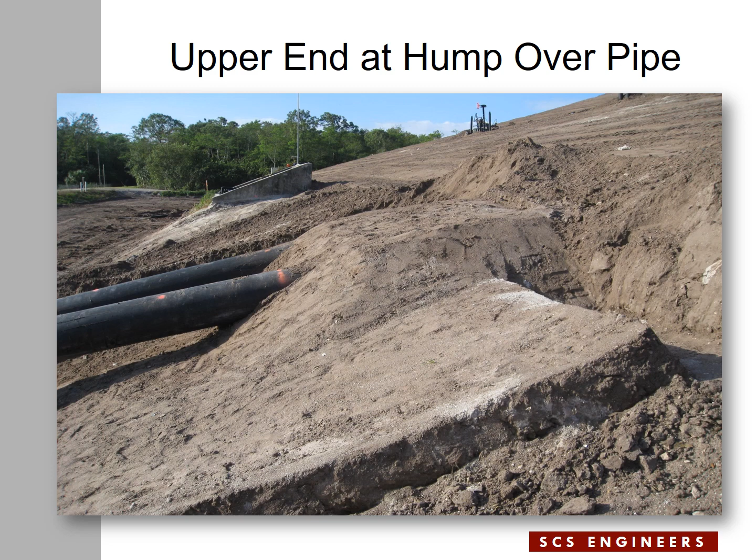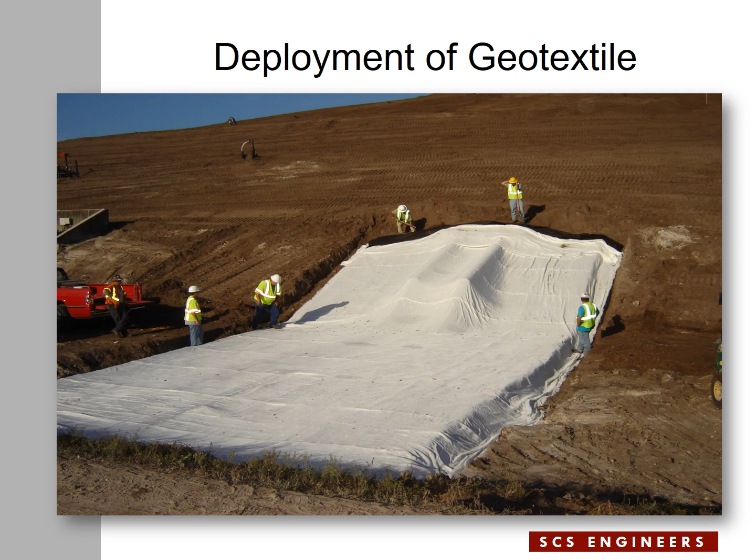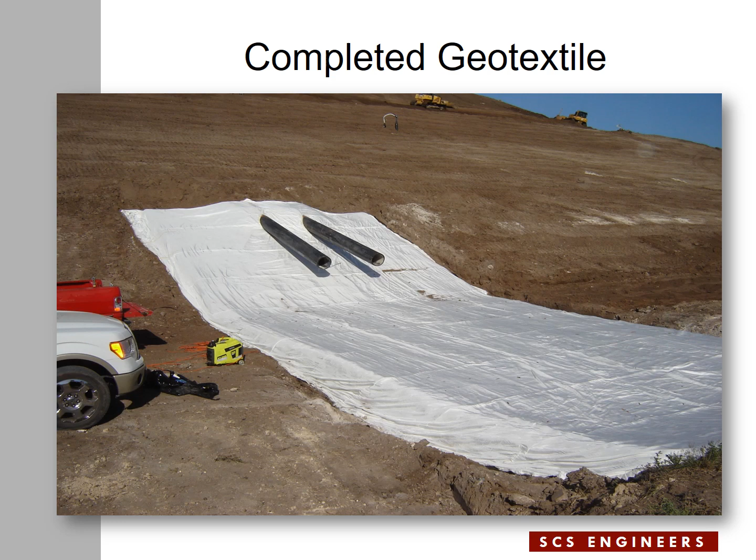Now the fabric form is cut, the pipes are sticking out, and everything is in place for the next step of pumping concrete into the fabric form. They start pumping. While they're pumping in the anchor trenches, they also pump into the fabric form itself. Again, the gray, darker area is where the concrete has already been pumped into the fabric form.

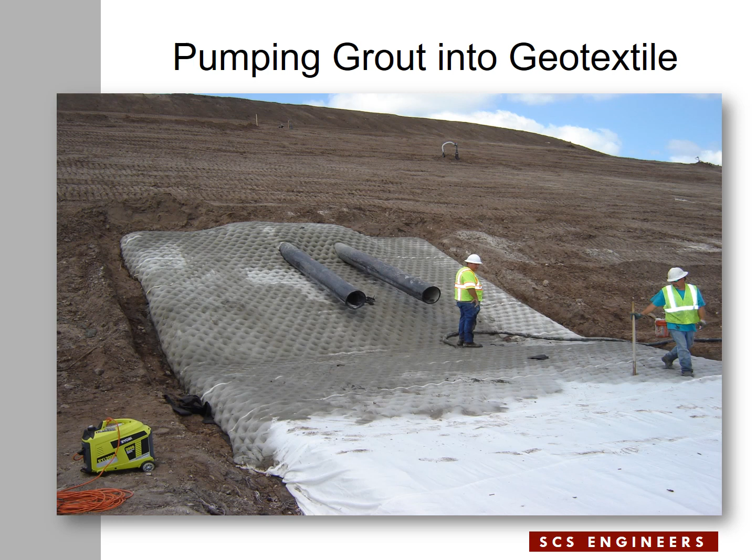Pumping is still in progress, and they make sure that on the sides the edges of the fabric form are well secured in the anchor trenches, and in the top area as well. More of the fabric form is filled with concrete now. They make sure that the edges are filled all the way to the bottom of the anchor trench and stay down, because we don't want the edge sticking up out of the anchor trench and being exposed to the elements.

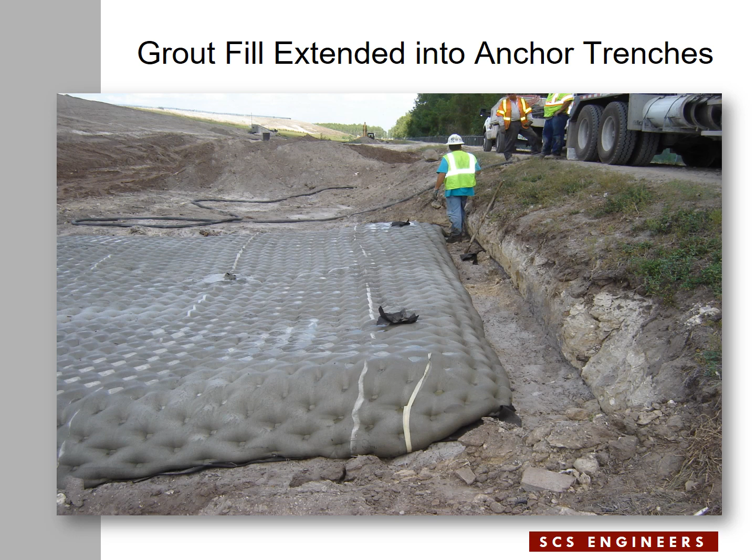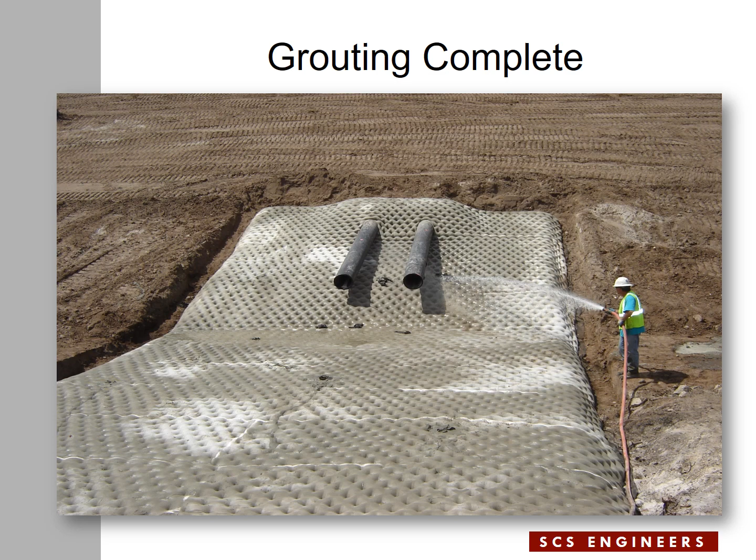Looking down, the upper part of the slide shows the fabric form at the bottom of the perimeter ditch. The anchor trenches are not backfilled yet. Eventually they get backfilled. The two pipes are sticking out. You can clearly see the pipes. Any water coming out of the pipes will fall on the fabric form and then sheet flow off the fabric form to the perimeter ditch.

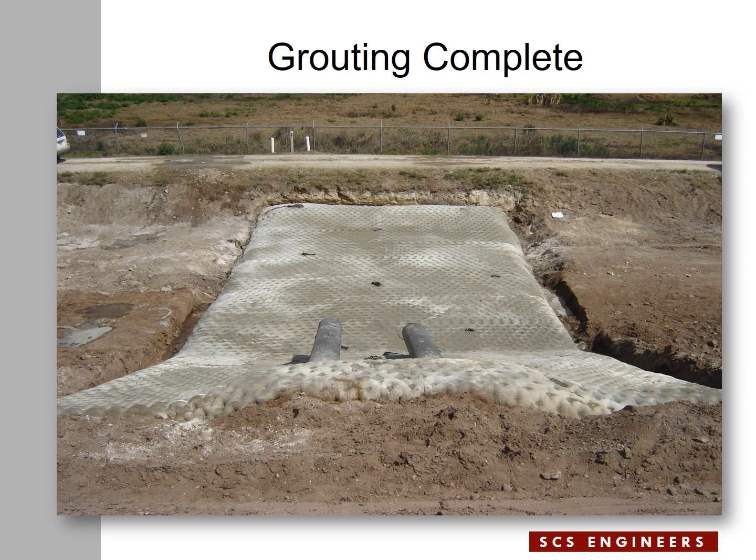This is looking at the slope. This is after the concrete is set. The anchor trenches are filled, backfilled, and the area around the fabric form is solid on the slope.

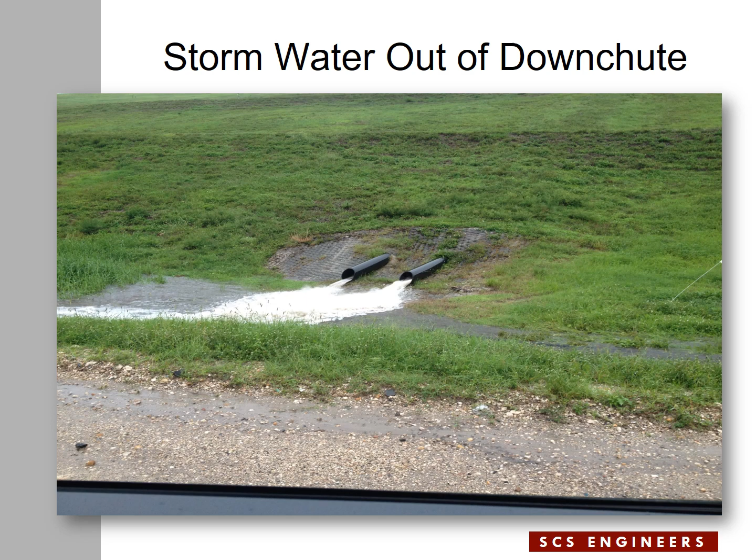This is another close-up picture of the water coming out of the downchutes. Since there is a fabric form at the bottom that the water falls over, there's no erosion created at the bottom of the perimeter ditch.